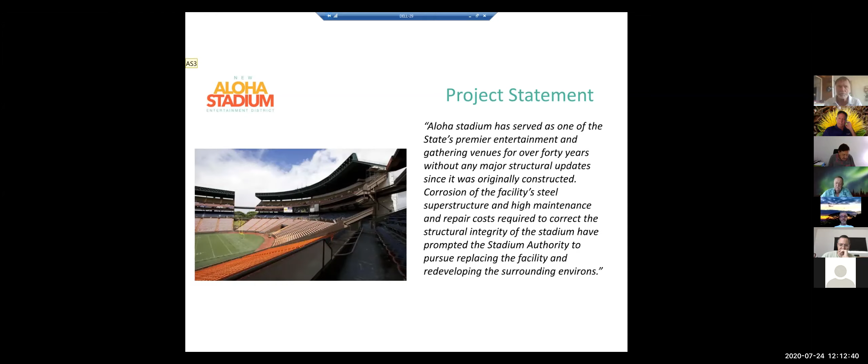So a little bit of history first. We'll go all the way back to November 11th, 1926, when old Honolulu Stadium opened at the corner of King and Isenberg. It was constructed entirely out of wood, and needless to say it got the nickname Termite Palace for obvious reasons. At the time it was the largest wood structure in the United States, and if it was around today it'd probably still be the largest. It seated about 25,000, which is fairly large.

UH played football there, and Major League Baseball actually played there. The New York Yankees played there, along with a couple other teams. Babe Ruth played there, and Joe DiMaggio hit the longest home run in that stadium. The Hawaii Islanders baseball team was there, along with the Poi Bowl and Pineapple Bowl.

Even in 1957, Elvis had a concert there. There was stock car racing, track and field, a lot of the same stuff really that the current stadium has. It performed just the same, and it went all the way until 1975, when it was closed, and that's when the Aloha Stadium we know today opened up. It was demolished in 1976.

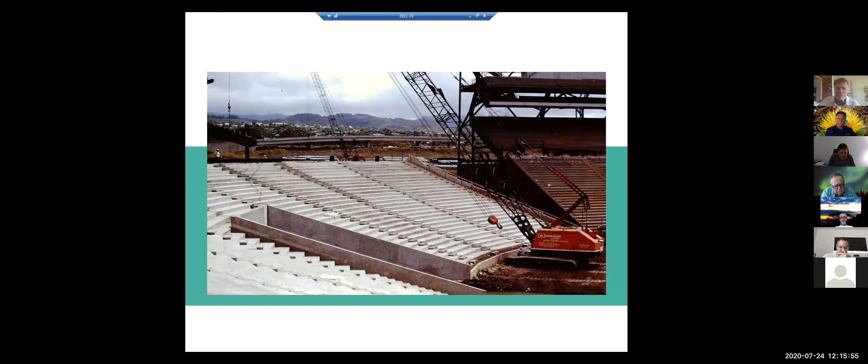But unfortunately, in Hawaii, with our marine environment and humidity, that didn't happen. It just kept rusting. So for the past 10 years, AHL has been trying to keep that stadium in business. It's been really tough.

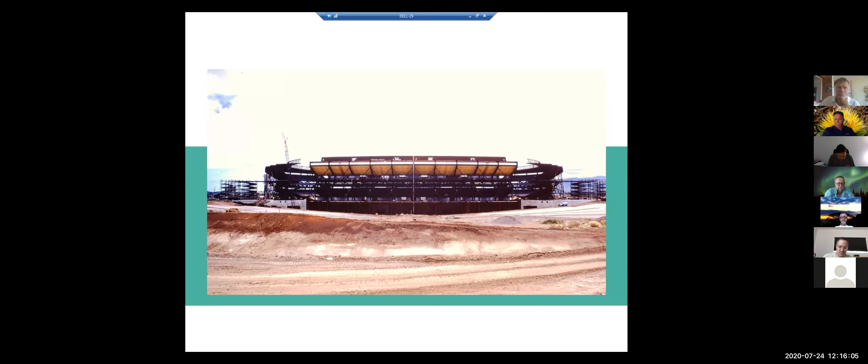One of the other things it really lacks is it doesn't have much technology. It's really 1980s, 1970s technology for the most part. It doesn't have skyboxes and the things that most people would expect to see in a facility like this these days, restaurants, corporate boxes. It's really hard pressed to do any of that.

There's a few more slides you can see under construction, the steel, just keep moving past that.

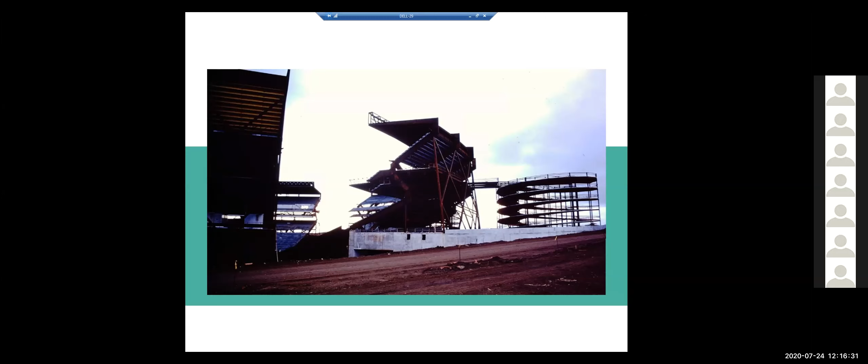So today, Aloha Stadium is pretty much what I just said. It's been doing exactly what it's been doing all these years. The big problem now is that with the new stadium coming on, the legislature is really not funding this project to be maintained anymore. So it might be that in the future we actually have to close down parts of the stadium because it may not be safe to have people in it. It'll be interesting to see what happens in the next several years until the new facility is built.

Next slide. So some of the things I just talked about, the swap meet - that's been going on, believe it or not, since 1979. 41 years the swap meet's been around. It's open 3 days a week right now, and it's actually one of the largest contributors to stadium income, and it doesn't even happen inside the stadium.

Pretty wild. And then next slide, 50th State Fair - another thing that happens on the site.

What I'd like to do is have Michael now run through - I've talked about the history a little bit - so now we need to start talking about, do we renovate or do we replace? We had to go through a whole process to decide what we wanted to do there. Couldn't just decide to tear it down. So what is that process, and what were the decision-making steps that we went through? Michael's going to go through that real quick.

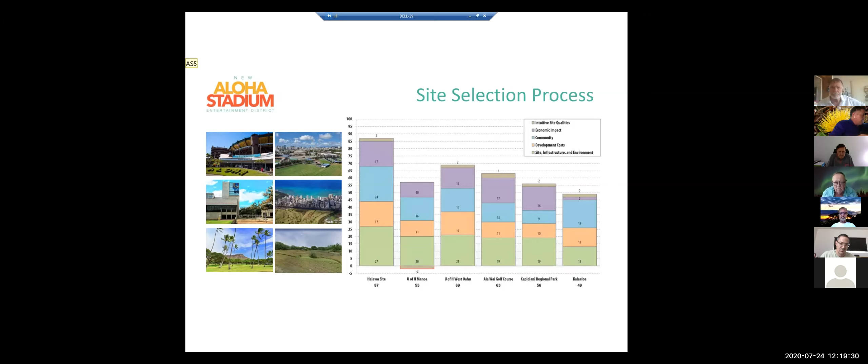This goes into, with Crawford, they did an extensive site selection process. Started with 18 initial site locations, looking at all the parks and areas that could handle the size of the stadium, then bringing that down to 9 to see where it could even be allowed. From there, they narrowed it to 6 sites and evaluated those. After all the site selection process, in the end, it looks like the best fit was to keep the stadium at the original location instead of moving it to another park or golf course or open green space.

NASED is terminology that came from the New Aloha Stadium Entertainment District. This is a special district that's going to have its own set of rules that it's going to be following. One of the key concepts is we want to incorporate live, work, and play - keeping it not just a secluded area, but something for the community to use and be able to enjoy.

And at the community outreach, these were meetings that have gone on through the past number of years. This is basically where, after taking all these things such as the site selection analysis, bringing it down to what you see in the background, 3 boards - option A, B, and C - and bringing the community in and asking what they want out of this project.

We tried to gather a few groups at every community meeting, 5 to 6 groups, and every table that sat down had a purpose or goal. We would get comments from the community and summarize them all, trying to incorporate them as much as we could into the new master plan.

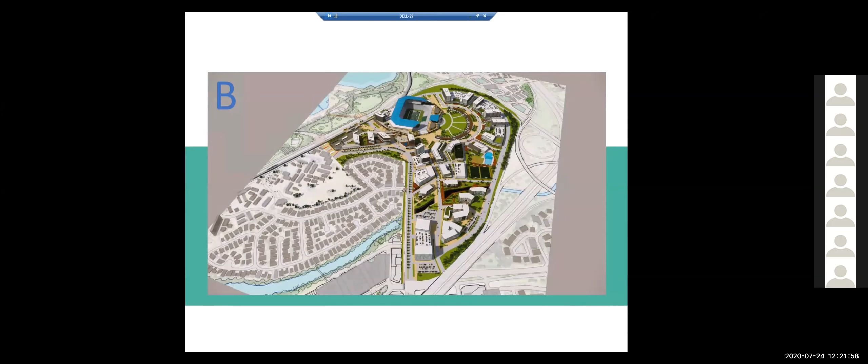Option B is moving the stadium, building it next to it while using the old stadium, and then demolishing the old one after the new one is operational. Option C is the same, but just south of the existing site rather than west, really breaking up that existing grid - which we can actually pull up a video real quick. That's really a fun look at the 3 different options.

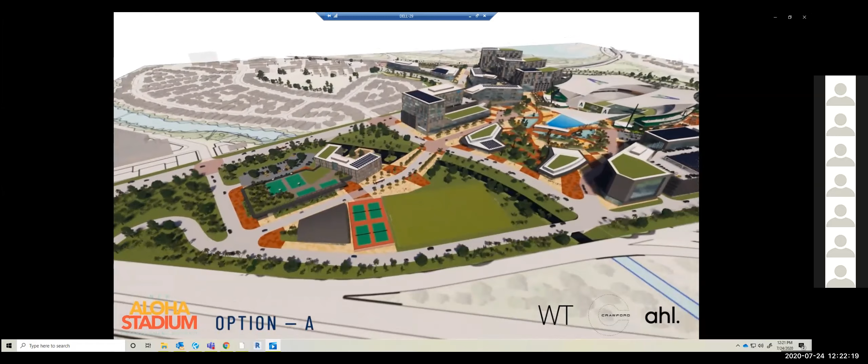So here, most of the taller towers or taller buildings are going to be residential, a couple hotel, a good amount of office space, but then most of the ground floor is retail.

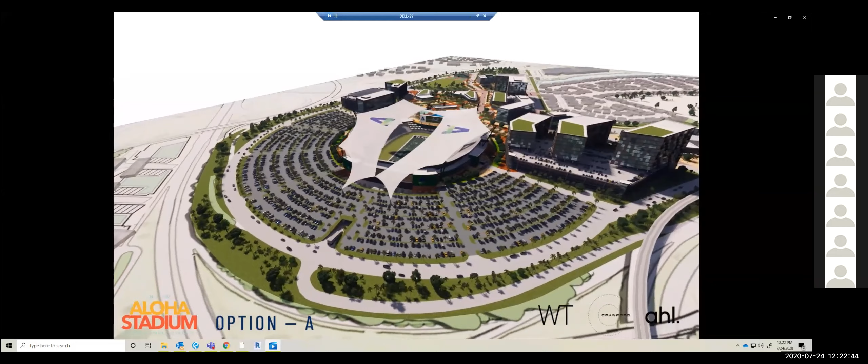Option A really kept most of the existing structure to the site, leaving a large majority of surface parking, but making sure they built up some tower residential presence around the HART site, because all 3 options are looking at getting that pedestrian connection between the HART site in conjunction with the Aloha TOD plan. And then option B.

Option B, which is ultimately the one that got further studies we can't show you more of at the moment, like Terry said - this one shows the stadium on the west side, and the depression where the stadium was originally sitting gets reused into a park or green space, an amphitheater of sorts, since it will already be a hole.

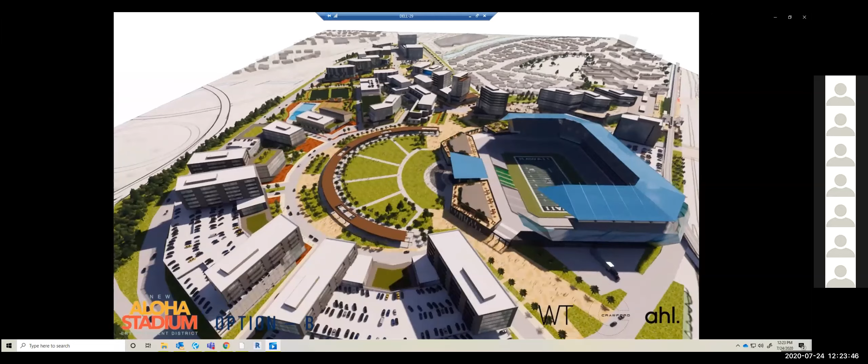But then there's generally this radial structure with shared structured parking and residential towers, really building up more of a district feel and less of a big surface parking lot like we have out there now. And then just more residential and office down that main street.

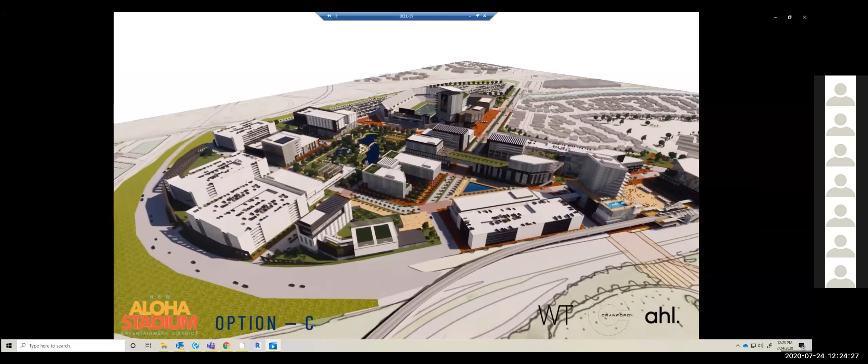And then option C, which is still keeping the same connection to the HART line, but draws a straight line across the site and really puts in this orthogonal grid to take you back down south, centering back around the park again, but much more traditionally laid out.

Just another option that we're going to keep open for the developing team that takes over the project, to really know that they have these in their arsenal to apply to their design when they start to think about how they want to use this site.

But then also you can see we still really like the idea of being connected to its neighborhood connections. There's some trailways and pathways in here that even has a good wiggle on the Halawa Stream, which is something in our thought and perspective - revitalizing that stream and bringing people down to it somehow.

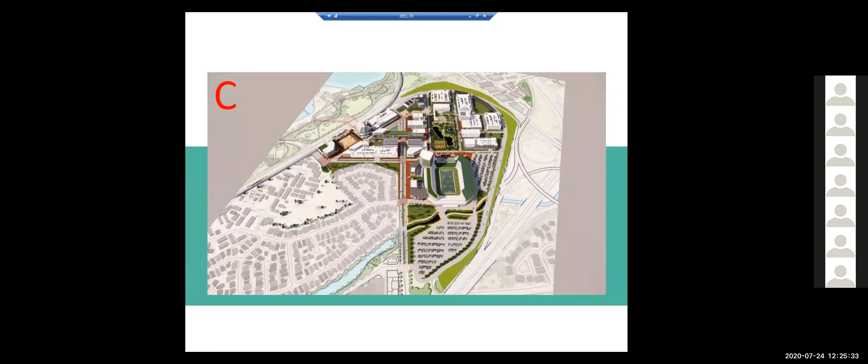Yeah, no problem. Before I do, does anyone have any questions about what you've seen so far, or shall we get to the end and then do a Q&A? Okay, no response means we'll go all the way through to the end.

Esports is becoming pretty big with some of the younger generations in both high school and collegiate competition. You've got your combat sports, NFL and CFL exhibition, in addition to some of the other things we've all gone to before - football, 50th State Fair, some motocross and things like that. So a lot of stuff going on at the stadium. Next slide, please.

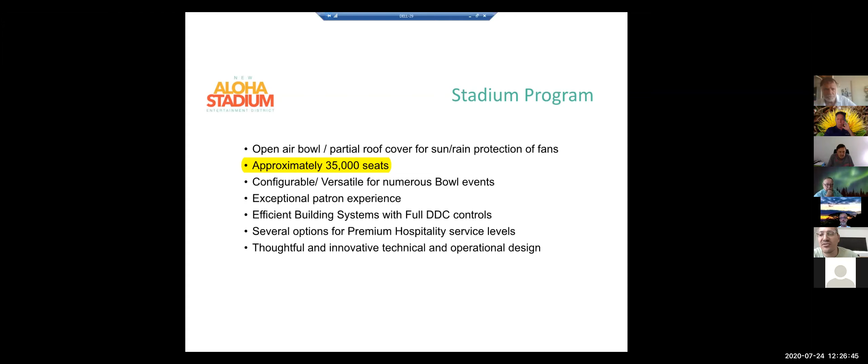Another thing to take into consideration is that the program is for approximately 35,000 seats. There's a study behind that as well, taking into consideration the existing stadium capacity and what the new stadium capacity should be. There are some other things here you could read through for the stadium program that are being taken into consideration.

Concerts, interestingly, in one or multiple of the concepts, can occur not just within the stadium for someone who's a big draw, but also maybe during the 50th State Fair, or for someone who might not be as big of a draw. There'd be an outdoor amphitheater, roughly the size of the Shell in Waikiki.

There's a continuation of the 35,000 seats, of which roughly 2,200 would be premium seats—boxes, suites, clubs, the loge area. The digital display board is planned to be two-sided, so you get a chance to be part of the scoreboard from outside the stadium, or potentially, if there's an away game going on, people could come to the amphitheater and watch the away game together. That's something being programmed as well.

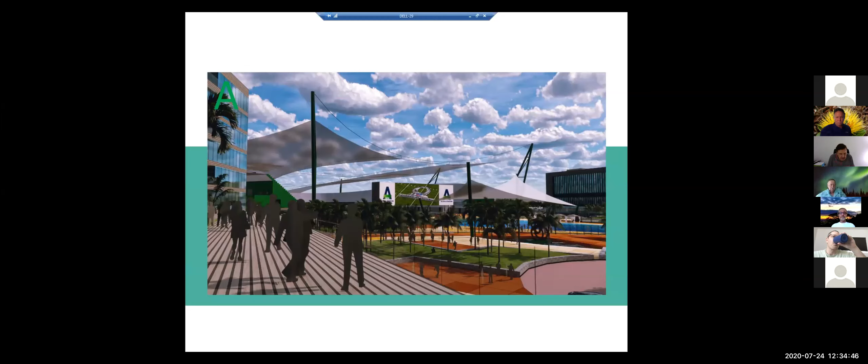I wanted to add one comment here: the options, the schemes, site A, B, and C that the video showed, those are studies that we did. We're not suggesting a developer would have to follow any of them. Basically, we take all the program that the studies have given us, saying you need this many square feet of office, this many square feet of retail, et cetera, and we lay that out on the site to see if it actually fits, and if it does, what kind of massing is involved and how big the project gets to be.

So we went through that exercise with 3 different options to find out some of the ways it could be done, to give the developer teams a few options to look at. We'd expect they would either take one of those options and expand upon it, or take their own option and work it out—it's up to them. So that's kind of where we are right now.

I guess what we can do is, unless Matt, you want to show a few of these, just show a few stills, and then we can have questions and answers.

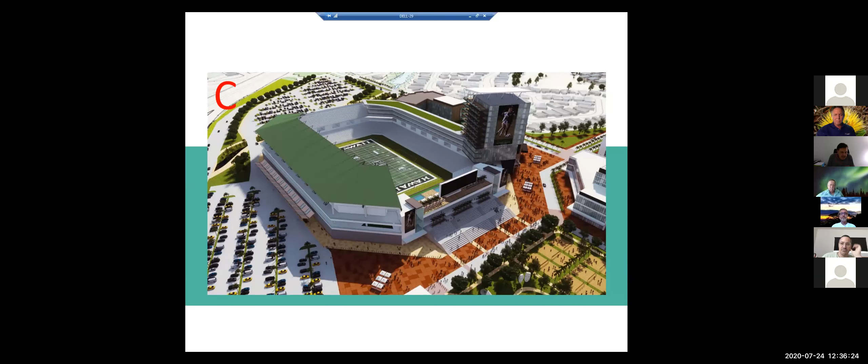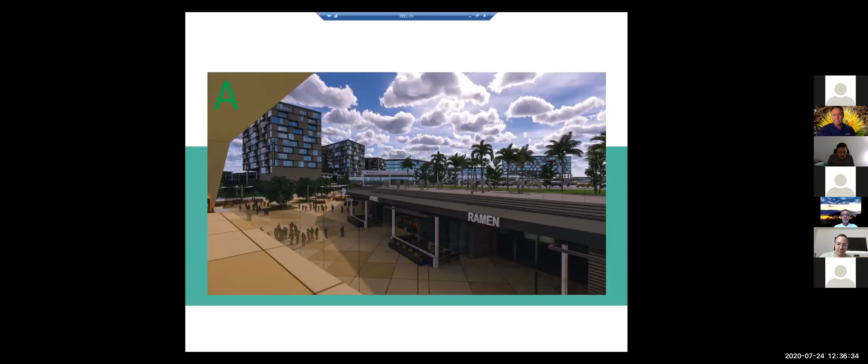So as you can see, it is a stadium, but it's far more than just a stadium. I've looked back through them a couple times—just some of the good pedestrian moments, actually being down in it, is nice.

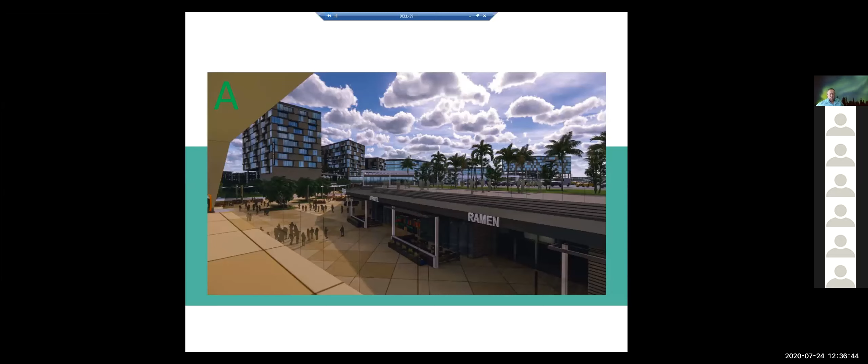So I guess at this point, we would open up to you guys for questions that you may have, and I'm sure you have some.

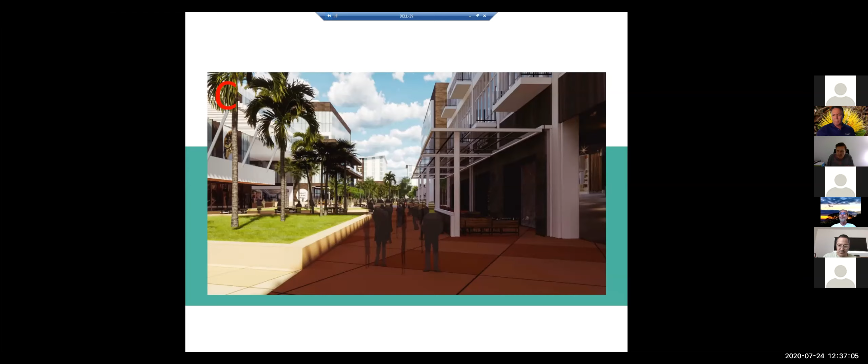I have one question—sorry about this—but depending on what happens with social distancing and how long that's going to be with us, is that being looked at, or are we just assuming we're going to be going back to normal pretty soon?

Yeah, at this time that has not been looked at, and I think the assumption is we will be going back—I don't know if it'll be back to where we were, but back to a different place. I'm not sure in the RFP, WT Partners may bring something up, some written part of the RFP may address that. I'm not sure, I haven't seen that yet.

So Bill, there haven't been any design adjustments associated with that, but I don't know if you caught the open games for Major League Baseball, and there's some cardboard cutouts sitting in the stands now in Major League Baseball stadiums.

Hey, this is Rob Kinslow. My question is, given what I heard you say that these 3 designs, A, B, and C, are just proposed layouts and not actually what the contractor and the down-selected developer would do, what can we say about how the footprint of the current stadium relates to the footprint of the new stadium?

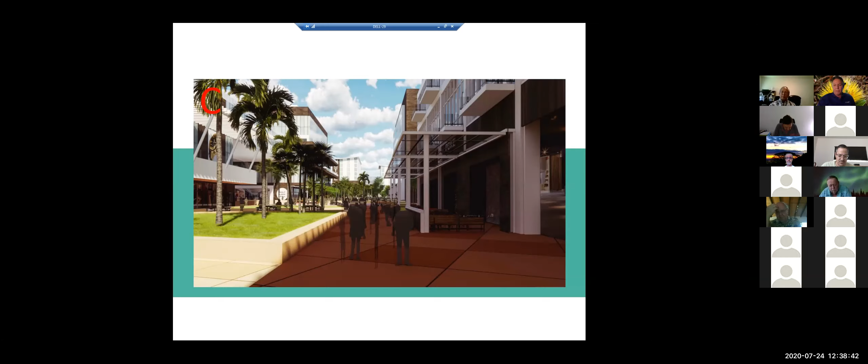In terms of size, how much larger or smaller is it? It appears that the designs you're showing are a little bit smaller and more vertical - that's just my sense of it, maybe I'm wrong. Since it goes from 50 to 35, it seems like it's smaller and more vertical.

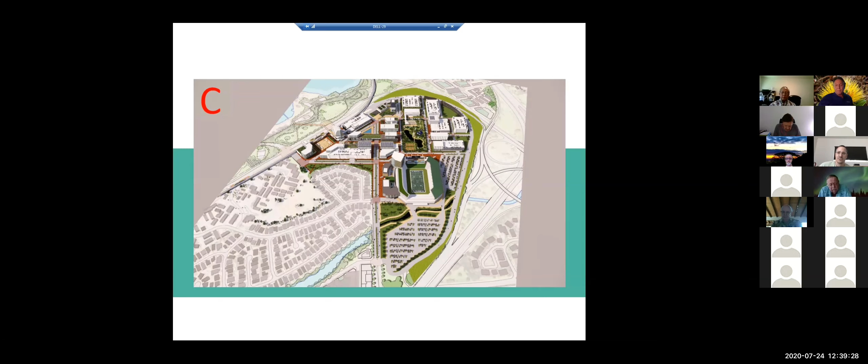Yeah, that is true. I think there is an option to increase from 35 to 40,000 with temporary seating if there's an event that would require that. But from the studies that Crawford did, 35,000 seemed to be the right number, and 50,000 seemed to be too large. Throughout a lot of the United States, universities seem to find that a good number for college events, for UH.

And then my other question is about traffic and drainage. Any consideration? I'm sure there was considerations there - could you talk a bit about that? Maybe Michael, you and Matt should talk about traffic and drainage, both of you guys have studied that for quite a while.

And it looks like they're going to go find another drawing here to show you.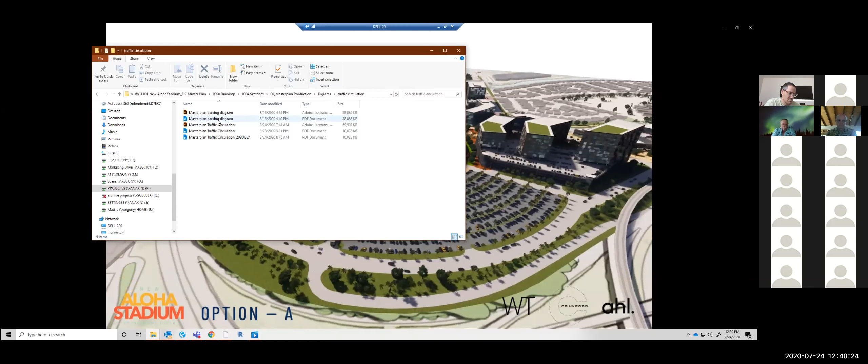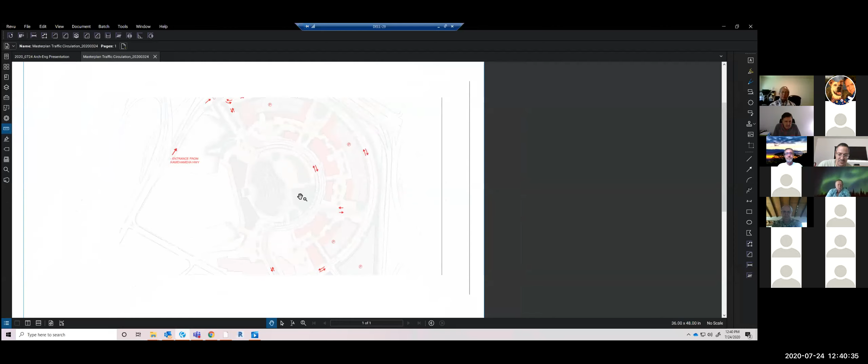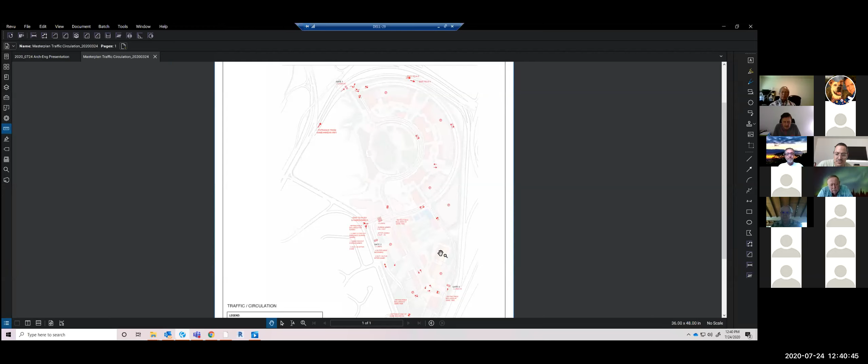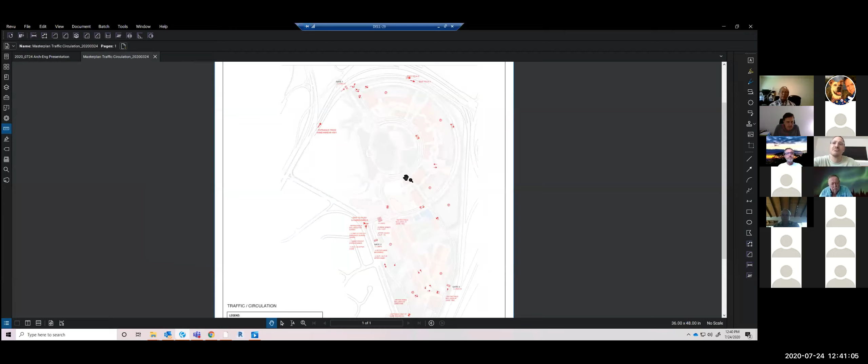Hey Mike, is this the best drawing here for you? Oh yeah, I think this explains it pretty good. Just for traffic and circulation - is that Terry? Yeah, I think. Yeah, go ahead, put that up. We maintain the circulation out when we go to the H3 and to the H1 and back to Salt Lake.

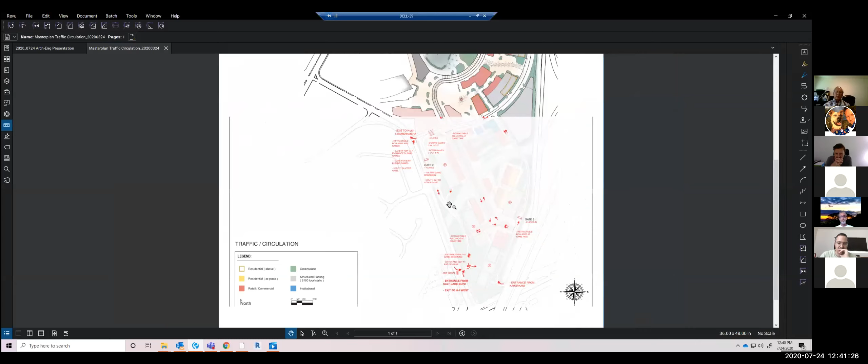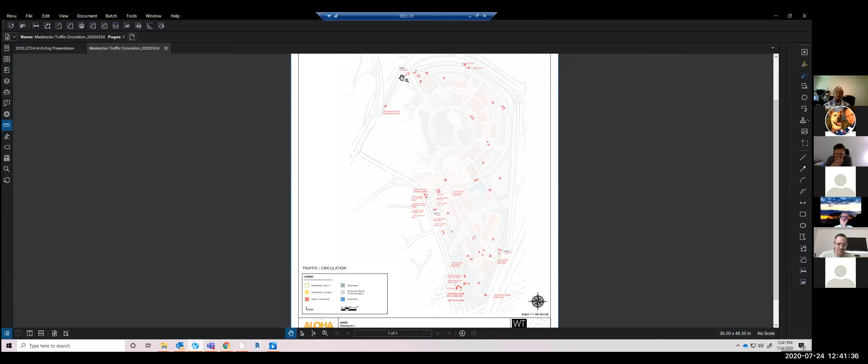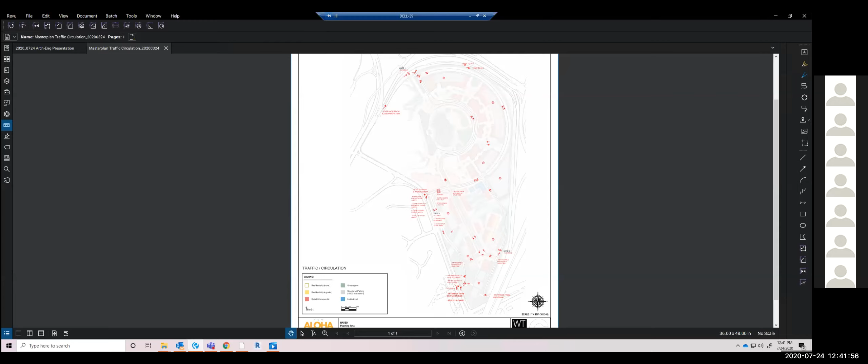So I guess another important thing we can see here now also is the bollards. One thing that's interesting on this site is that if you look at the top left entrance and the bottom right, you can see that there's that - Michael, you're breaking up. We lost you, Mike, I think we lost them altogether.

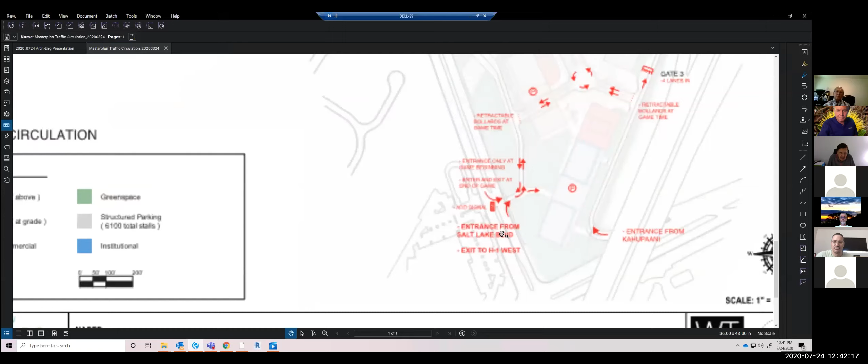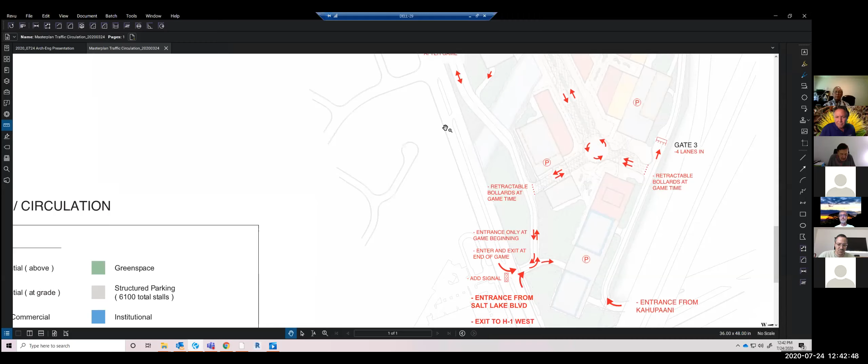So one of the things we were talking about - Matt, maybe you could get your cursor there to show it a little - is to get people off of Salt Lake Boulevard. We've actually gotten them into the site and have them queue up on site basically instead of on the street. So we have areas where they can queue up prior to a game or after a game leaving, so they don't get into all the major streets. That's one of the criticisms the folks had at community events, they said it's really terrible because I can't even get to my house when there's an event happening. So we're trying to help so that doesn't happen, or at least happens minimally compared to the way it is now.

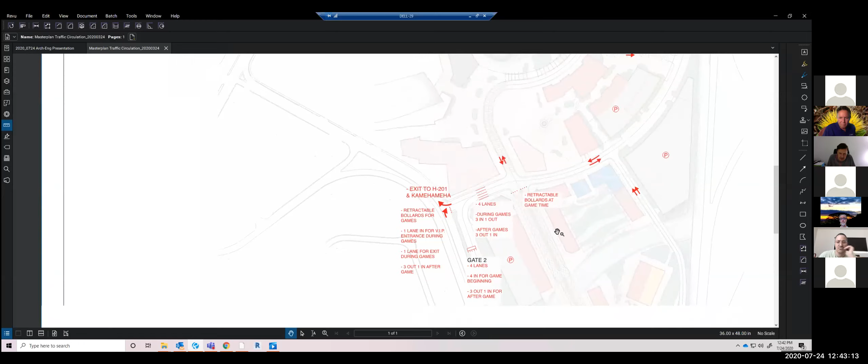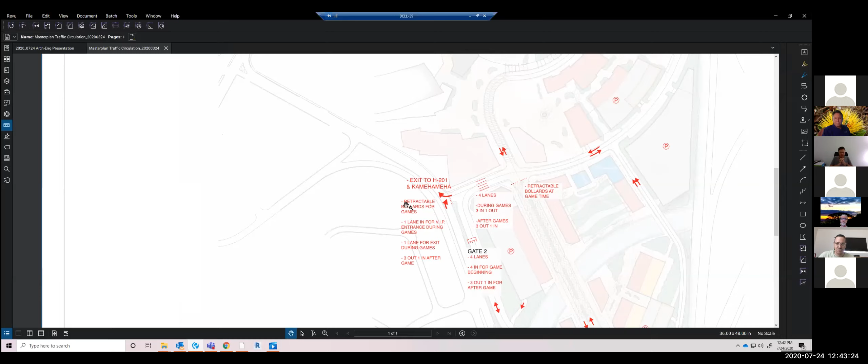Also, we aren't even talking about gates on site anymore necessarily. The gate's going to be in structured parking, because the heavy majority of all the parking on site is now structured or garaged. So instead of having gates that people have to queue up to on the roads, you'll just queue up at the entry to whatever parking structure is on the site. And they're talking about technology where you could book your parking on your phone and pull up and pass, so it'll be a whole different kind of traffic flow ideally, and less of a gated community that you have to get into and more part of the context.

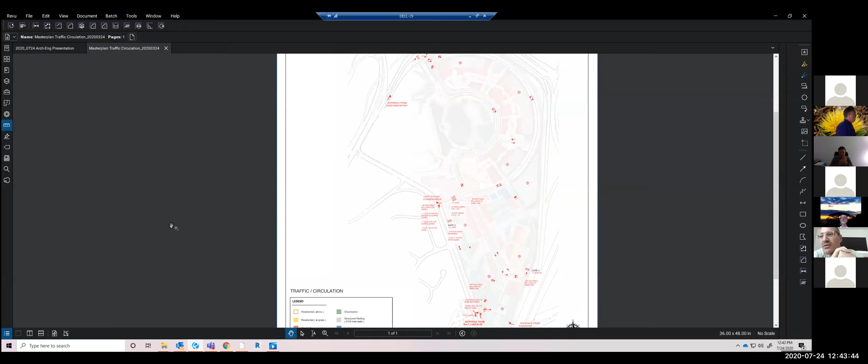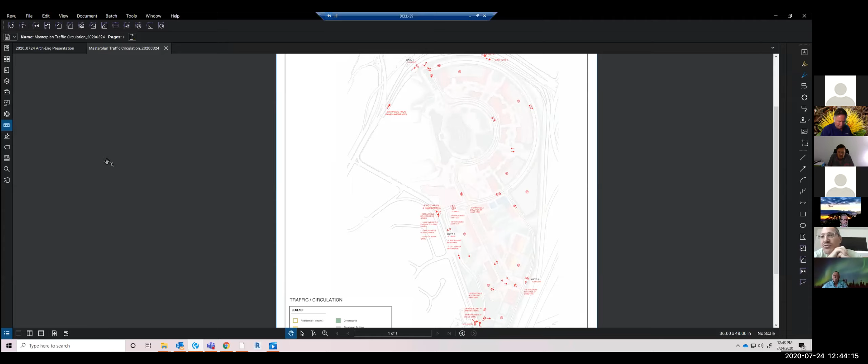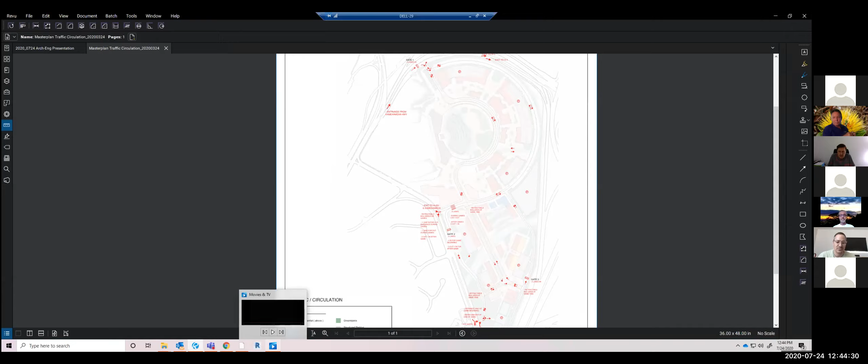Can I ask a question on this? Rob, can I ask a question on this? Sure, okay fine. I'm sorry, Hawaiian Electric's taking down a mango tree on our street, they're worried about the hurricane and the tree going down.

Anyway, a quick question is, I'm looking at this, I don't see a lot of green. I'm looking at a huge heat island created. I'm wondering if there are any environmental statements that are going to say that we are going to have more shade than what there is existing already, if we can have a comparison with what we've got and what we're going to end up with.

Did any of you guys catch that? I didn't really catch his whole question. Okay, we have a lot of green space there already. Yeah, we are going to create a huge heat island there.

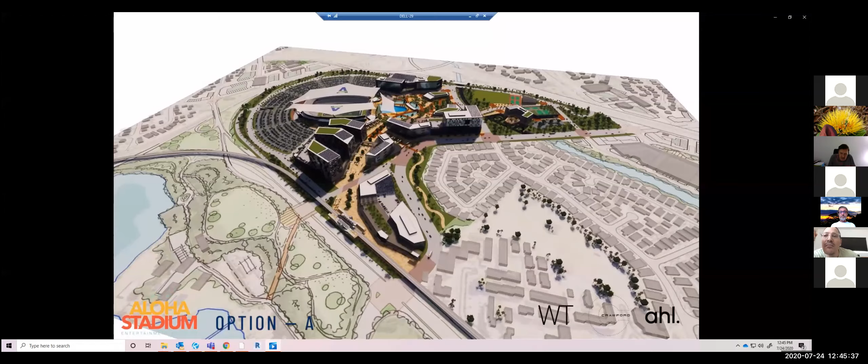Are there any studies telling us what we have in terms of biomass now, and what we're going to have in terms of ground cover and shade later on? No, we haven't really done those studies because this isn't the final scheme yet, so we haven't gone through that at this point. That's something that will need to be done, but it hasn't been done yet.

Okay, there's just a couple of other things. Amazon have just bought 19 acres. They're going to take a lot of retail space out of the system in Hawaii. How do you think retail is going to be supported in this area? Just by the local residents?

Yeah, maybe Ethan, do you want to respond to that? The studies have shown that it's the local residents, the military, the tourists - a combination of folks that are going to be supporting the retail. And above the retail there's now a built-in bunch of people that are going to be using it. So it's not just the Salt Lake and Aiea communities that have opportunities or needs for retail, but the amount of people anticipated to move into this whole development will increase the need as well.

As far as square footage, what we can say is that we're looking at multiple opportunities for both small scale mom and pop local shops as well as kind of medium box. We're not anticipating a large box or shopping center in this development, but there are a lot of different opportunities for mixed retail. Not to mention the swap meet will still be functioning on site, so there's a kind of synchronicity between the two.

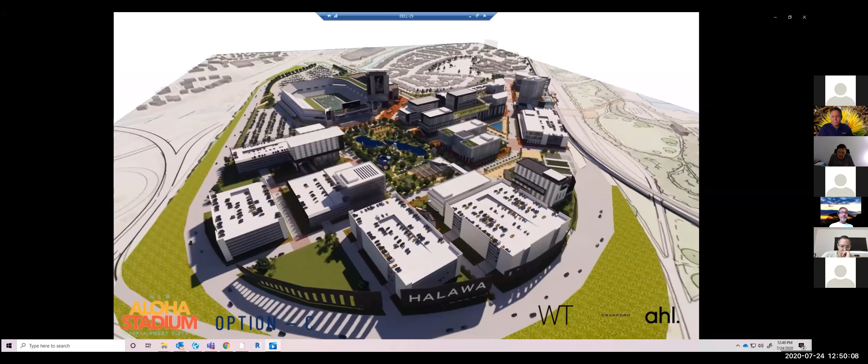The city has gone through and done their own community hearings and planning studies, and they will be finalizing their TOD overlay plan and rezoning on this as soon as we get feedback on what the developer is really going to end up being able to build. Yeah, but I believe the whole site is within the TOD zone. Yeah, it's all within half a mile.

May I ask, has there been any overlay on solar possibilities on this site? Solar electricity? Yeah, we've got some studies. Michael, or Matt, you guys might want to talk about that in a little bit.

But yeah, we've done studies on that, and there's quite a bit of solar potential on it. And actually, Matt, you might want to talk about the water too, because we didn't really talk too much about that.

We didn't get into too much of the nitty-gritty, but within the design guidelines we're talking about a district chilled water plant for general building cooling across the district scale, just to maintain efficiencies. Also, on top of these buildings in option A, any vacant rooftops are expected to be used for green roofs, reducing urban heat islands, water runoff filtration, and also solar panels. So those are both mentioned and encouraged, or mandated, in the design guidelines.

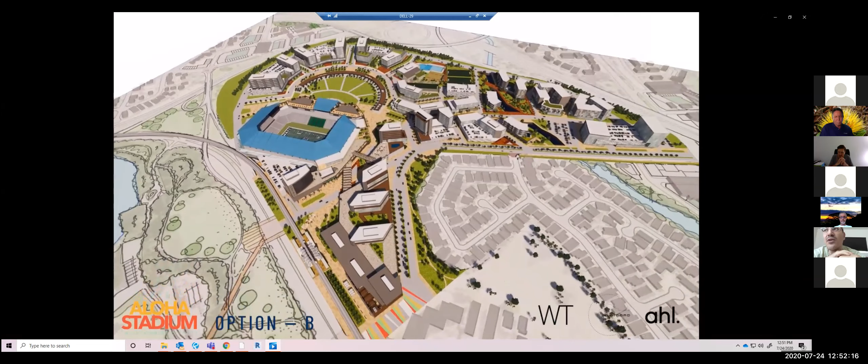One of the things to mention, there was a question about drainage. So one of the further studies off these design concepts looks at the natural slope from Aloha Stadium down to Halawa Stream. We're not civil engineers, so we haven't done calculations on surface area, grassed area, or permeable and non-permeable areas, but we're looking at opportunities to handle the drainage in a very natural way, so it would flow through bioswales and rain gardens before going down to the stream, getting filtered naturally.

On the solar side, when we look at some of our parking garage options, there's an opportunity, instead of having cars park on the top level, to create a parking garage roof deck solar farm.

And the minimum is LEED silver on this. It's interesting, I talked to Crawford because we really don't have experience with how a stadium gets to LEED silver. Is that hard to do? And they said, no, it's fairly easy to do. So even the stadium will be LEED silver at minimum.

Would you consider this development middle class or upper middle class? Because one of the things is I see you have a lot of cars there. I've seen a talk, about 7 years old, from New South Wales Sydney University in Australia, where the man stated that by 2025 it would be 5 times cheaper to have an app on your phone than to own a car. I don't believe Hawaii is going to do anything but go in that direction.

Yeah. I don't know what to say. We're definitely thinking about other kinds of parking reductions we could take advantage of because of transit, and also people maybe not owning cars, and having a mix of high-end and affordable housing throughout the site.

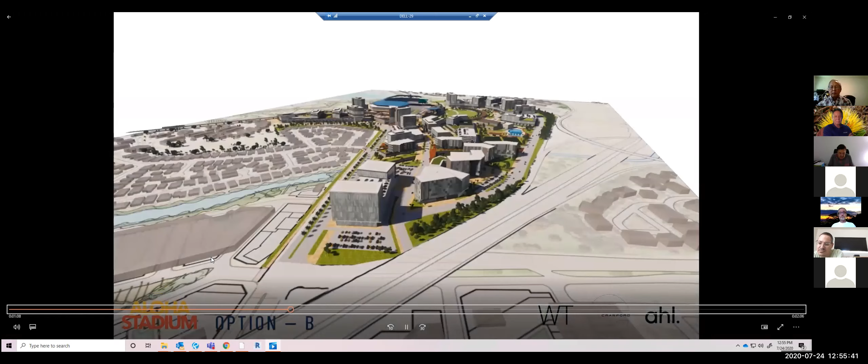The second question is, the legislature rejected this Aloha Stadium bill just about a week ago. So how does that affect the development of the stadium? And the third question is, how much of the development plan is locked in? Is it still changeable, or are all those floor areas for different purposes all locked in? Depending on the answers, I might have a comment later. So thank you.

Okay, maybe go backwards on this. As far as the studies that were done, that locked in our study. However, if a developer team comes in, they will do their own studies, right? They're going to do that.

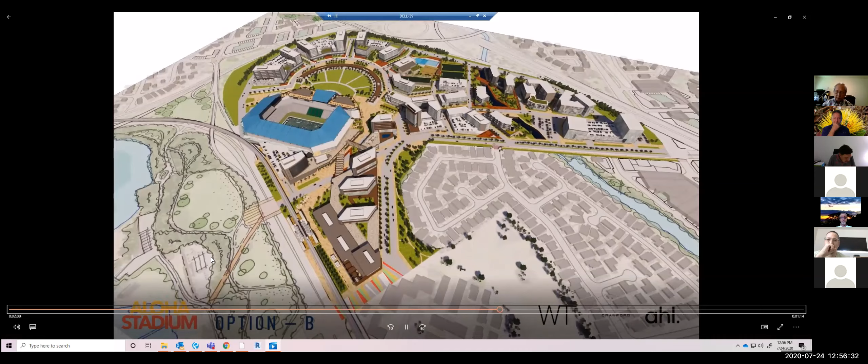If their studies show that's not how it should be, and our guys look at it and agree with them, then that's what it would be. So I don't think we're locked into those numbers right now, but those are the numbers our guys are telling us. If somebody comes up with new numbers and can validate them, we're not going to dig our heels in and say you can't do it, you have to do what we say even though it might not be right. Things change as time goes by—COVID wasn't here when we did the study. So it can be different.

Second one was the legislature didn't actually turn it down, they just didn't vote on it. They left it ride. The reason was that part of the bill was incorrect—it tied HCDA to something they didn't want to be tied to. HCDA typically has 65-year leases on their property, and the stadium is going to have 99-year leases. The way it was written tied HCDA into 99-year leases, and they didn't want that. So the bill is being supported, it just can't be passed because the wording wasn't right. They have to change the wording and re-vote on the bill. It's possible we may have to wait all the way till next year until the legislature comes back into session.

But it's possible maybe to get this on a special session, because the state's going to get some federal monies for COVID and they need to figure out what to do with that money. So they'll have a special session to decide where that money goes, and I think DAGS is going to try to get the stadium put back into that discussion so it can move forward faster. But by no means is it dead—we're still working on the project full speed ahead. It hasn't stopped us at all. It's still moving forward and it still has support.

My comment on the overall design is that I know there were public meetings, and I went to a couple, maybe there were 100 people there. But there have been broad-based surveys of Hawaii residents, and they indicate that affordable housing is Hawaii's biggest need. One survey said the top concern of Hawaii residents was the cost of living, and housing is the biggest item in most families' budgets. The second biggest concern was affordable housing itself, and the third biggest concern was homelessness—which is caused largely by the shortage of affordable housing.

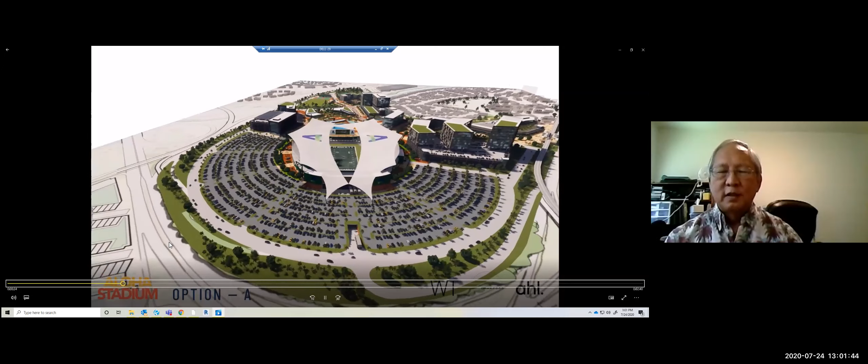The stadium site has about 40 acres not designated for the stadium and affiliated parking. The current plan envisions a mixed-use district with some housing, but it could accommodate tens of thousands of affordable housing units. It's a perfect place for affordable housing because it's next to a rail station and it's state land, so the financing is made a lot easier because the land doesn't have to be bought. If there were, say, 20,000 affordable housing units built there, it would accommodate perhaps 50,000 people—potential customers for all the events happening at Aloha Stadium.

So I just present that as an idea to this group that would satisfy Hawaii's huge affordable housing needs while making the Aloha Stadium complex idea more financially viable. So thank you for your attention.

Thank you, John. Those are very good comments. Can I respond to those comments?

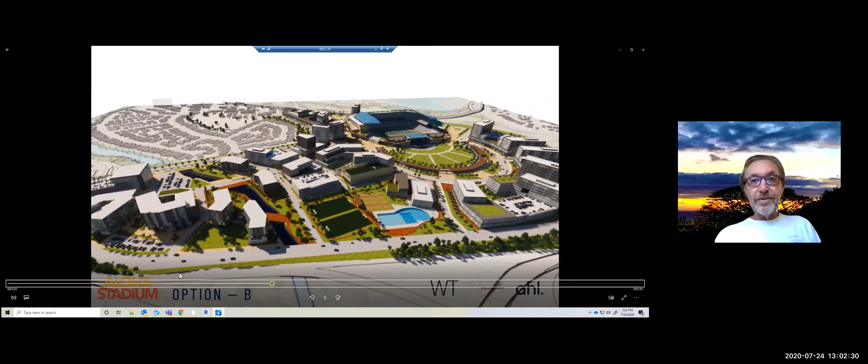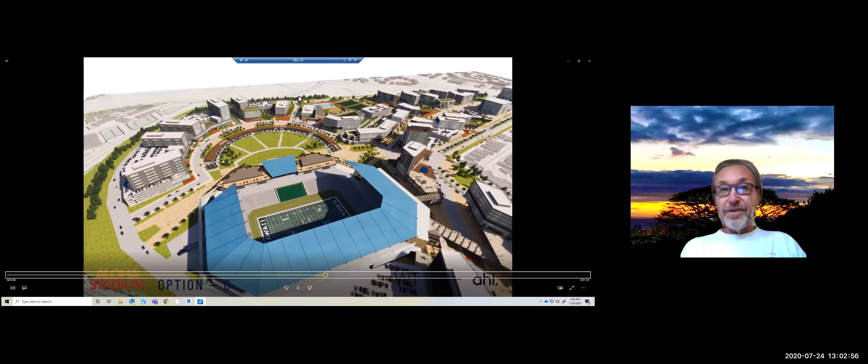The trend on the mainland is that they have public housing areas and affordable housing areas. They used to put them in their own little blocks, so you always knew where the projects were. They've been taking out the projects and infusing them with other types of housing, because the folks living there really wanted to be more mixed in with the rest of the community. In a lot of these major cities, they're bringing in wealthy people into these areas, so you want a mixed-use, mixed-income type of scenario.

We don't want to just cater to workforce housing, because the construction cost for workforce or affordable housing is about the same, not much more expensive to do something higher end, since the cost is in the facility, not the finishes. The developer has to be able to make this thing pencil out.

So what the public-private partnership will do is figure out what that mix is. HCDA and probably the state of Hawaii will mandate a certain number of affordable housing units, but it'll allow the developer to do market rent, market rate, and higher end units if that seems reasonable and viable.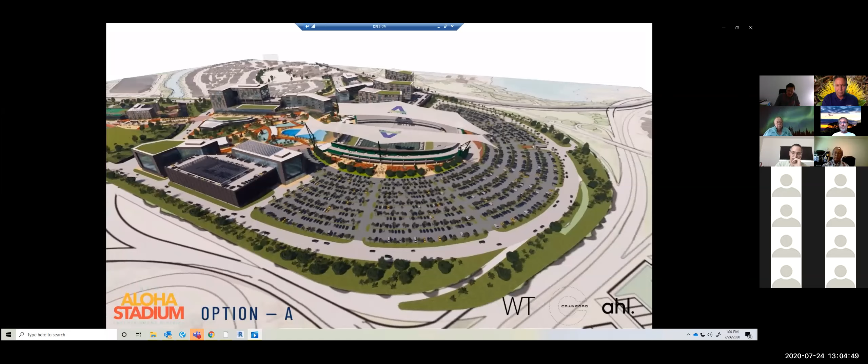Because there are very few developers that'll go after this if 100% of the residential units are affordable. The trend is to get a mixture of incomes together, and in Hawaii that makes perfect sense because we're all in this together, aloha and everything. So I don't think there's a lot to worry about—there will be affordable housing, but it'll also offer other housing types for other people.

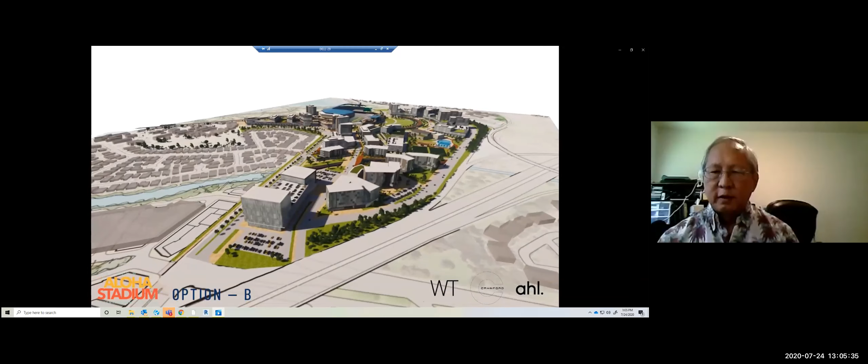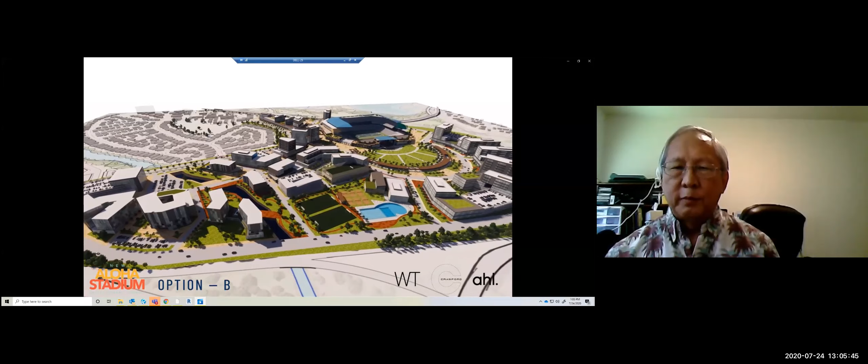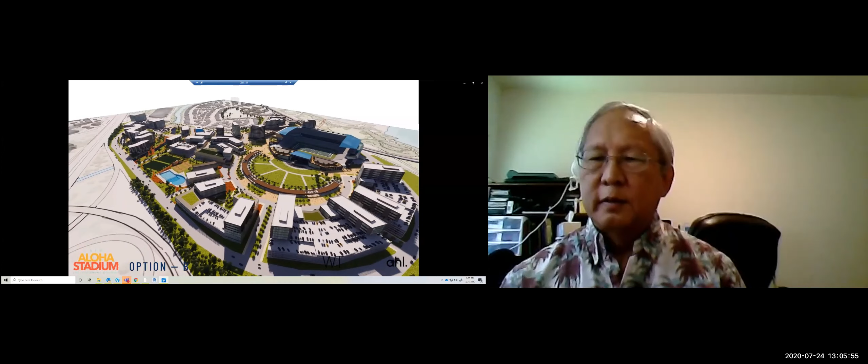So I agree that residents of different income levels should be mixed together, and this should be a mixed-use development. There should be lots of commercial, especially on the ground floor, with grocery stores, mom and pop stores, retail stores and gyms. That's the exact intention. Because that would create a walkable community, reducing the need for personal vehicles, and be much more environmentally conscious.

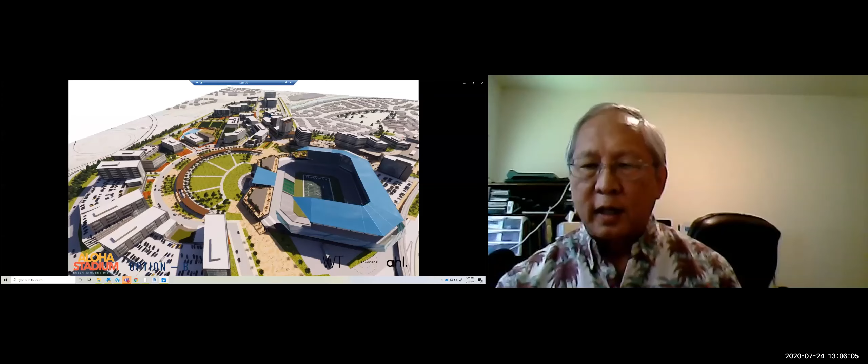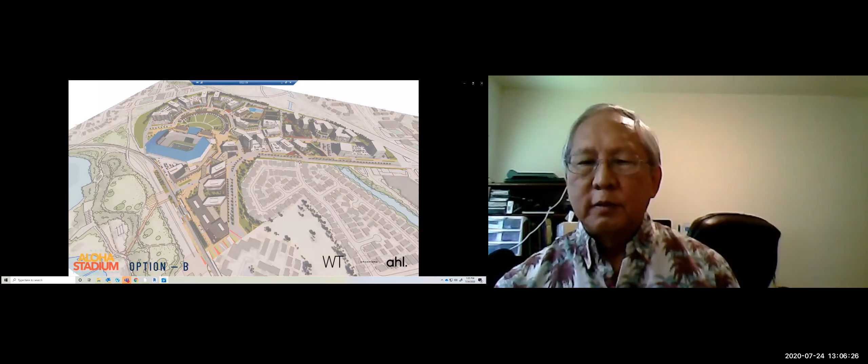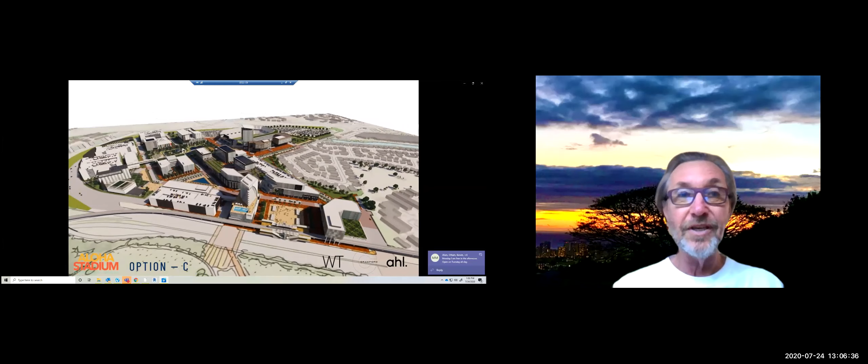But affordable housing can be mixed in with higher end housing—it's been done already. And the affordable housing is subsidized by government. Lots of affordable housing can be built here. It's one of the few city or state sites near the rail line that's this big and can accommodate so much affordable housing. There's affordable housing that, if not built here, will be lost.

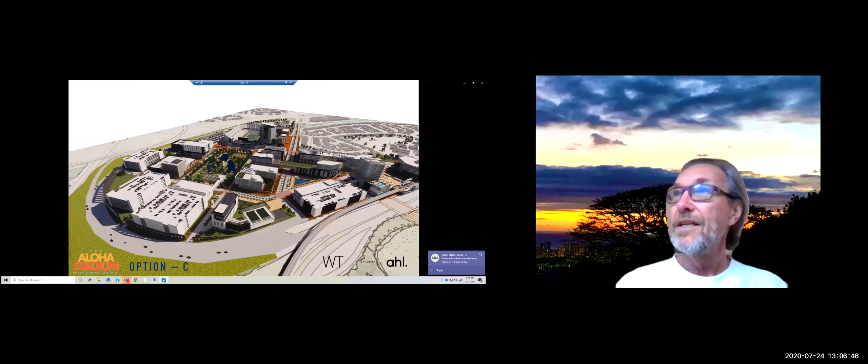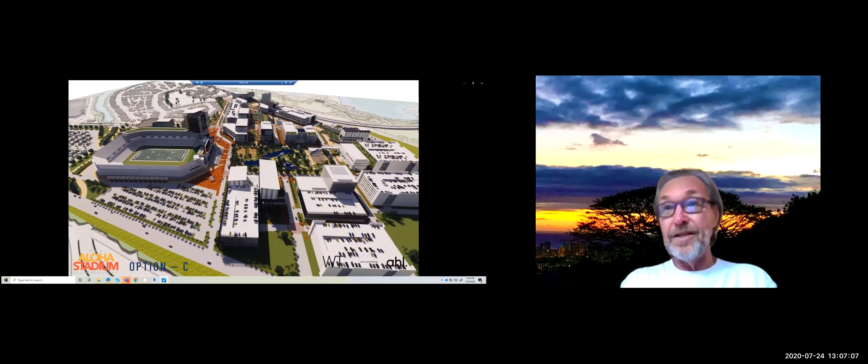HHFDC actually has a site that's in the TOD overlay zone, and they're planning on expanding as well. So it's not just here—the state owns a lot more land than this, and that's being planned on as well.

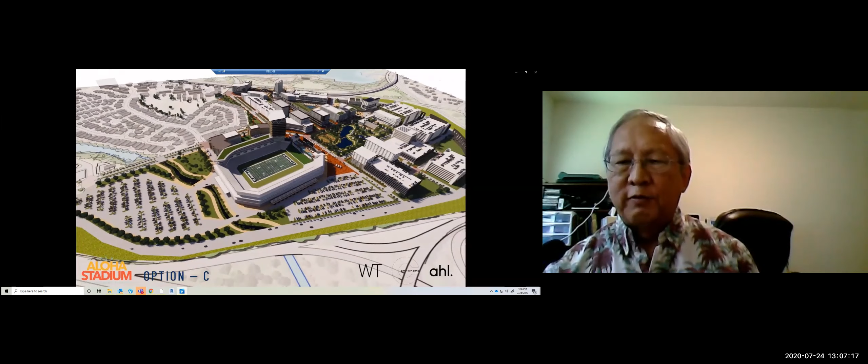The state needs tens of thousands of affordable units statewide, and some affordable housing is being built now. A lot of it is being built on private land, making the costs higher. But this is public land, so the cost of construction will be reduced considerably.

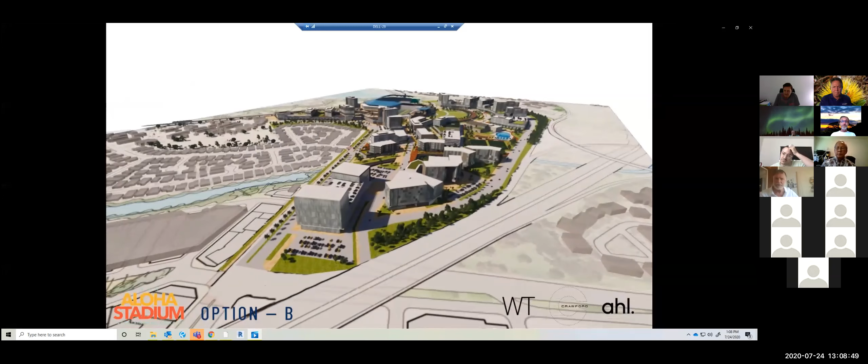I've been going to the mainland looking at TOD projects, and this TOD project ranks up with anything I've ever seen. It's using all of the design concepts. It's a world-class project that we're seeing here, and compared to anything on the mainland, it's at least equal.